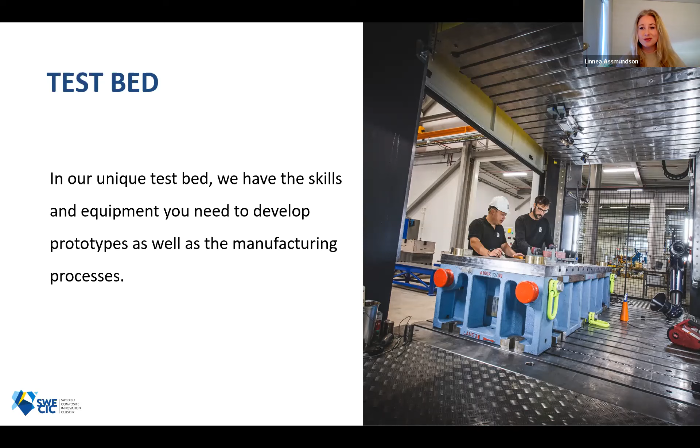So what do we do? We work with development. We help companies speed up their innovations. We have a test bed that is open access to you, and if you have an idea that you want to develop or want to try out something, don't hesitate to contact us. We can guide you all the way.

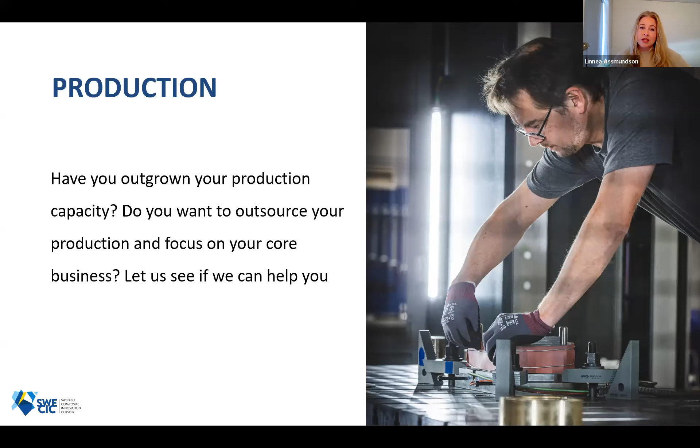And we can also help you with the production. We have knowledge within most of the different types of production methods that are normally used. If you want to contact us, these are our contact details.

Anders, that's your cue. You are responsible for that conference, aren't you? Oh, at least one of the sessions. Okay, great, Linnea, thank you.

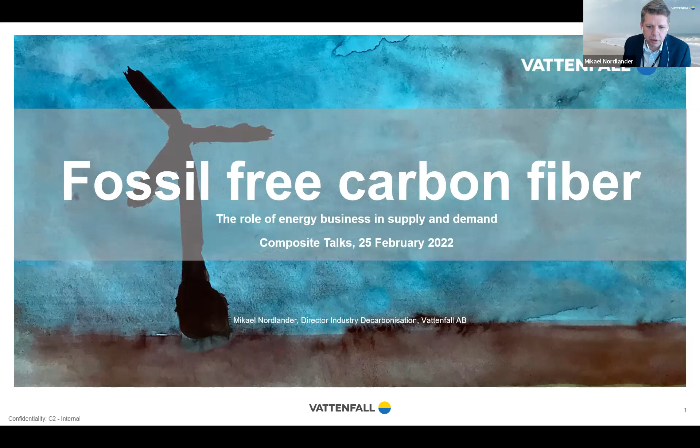I will try to dwell into these two perspectives, and in particular what it means for composites, and most notably carbon fiber, which has been a specific interest of ours.

I won't bore you too much with what Vattenfall is. I'd recommend going to our homepage, but condensed to its essence, what we're doing is trying to achieve fossil-free living within one generation, because we believe that being sustainable is a prerequisite for still being in business one generation from now.

That basically runs through everything we do right now, and I'll go through why and how that happens. First, why we as a power company see that we can play a role far beyond our own operations, how we team up with industries to get rid of emissions beyond what we do ourselves in the power sector. A bit on why we started this in Sweden, and the dual roles I mentioned - as a supplier of fossil-free energy to industry, and as a customer of what comes out of the industry and those value chains. Finally, a few words on why we believe this will mean a sound business long term.

So if we start briefly with why electrification - well, this is truly a depressing picture, I realize, but the fact is that still today about 80% of all energy consumed globally is fossil fuels. And although renewables are steeply on the increase, we have lots to do when it comes to replacing fossil fuels.

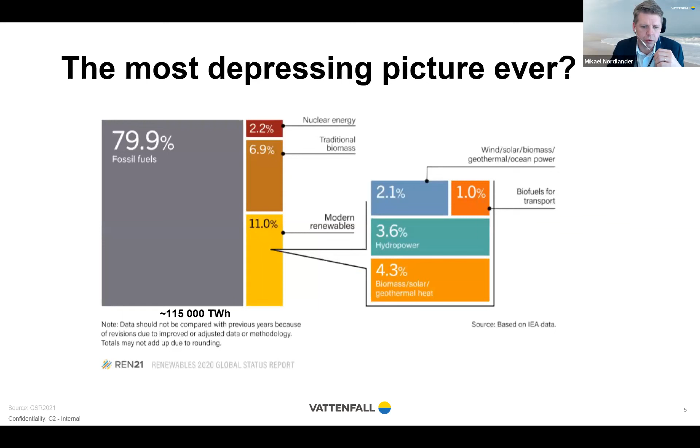In several sectors we know how to do that, but I'll focus on the ones where it's a bit harder - the ones typically labeled the hard-to-abate sectors.

If we envision ourselves mid-century and look at how we can possibly get rid of fossil fuel use - if we need to replace that energy in all its applications, be it heating, power generation, transport, or industry - we believe the most promising solution is to do it with fossil-free and renewable power.

Wind and solar have shown tremendous cost decreases in the recent decade, and they're also pretty quick to scale up, so we can really reap the benefits of manufacturing economics when expanding that. This is basically our best shot, but it will be quite dramatic if we are to replace those vast amounts of fossil fuels - some estimates suggest up to 5 times more power production than we have today.

The lower end of that scale depends on how successful we are in becoming a more circular economy. So there's really no contradiction between the circular economy, energy efficiency, and shifting to fossil-free and renewable electricity. We need to do both - the more successful we are in efficiency and circularity, the less primary power is needed. Now, square electricity doesn't fit into round applications everywhere.

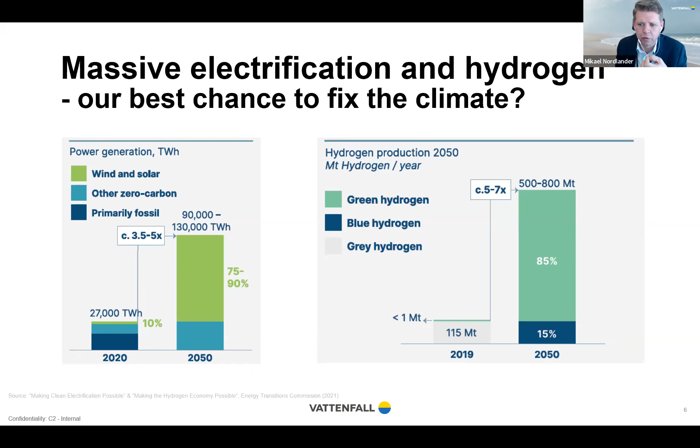So an important part of this electrification, we believe, will happen as electricity is converted to hydrogen. Hydrogen can then play a role in replacing fossil fuels in primarily lots of various processes in the industry.

Going into what we're doing in industrial partnerships, the heavy industrial processes we're focusing on are primarily the ones producing basic materials. Steel, cement, and plastics are responsible for not 20% of emissions in industry, but 20% of global emissions. In Sweden that's no exception - about one third of CO2 emissions comes from industry, and 85% of that is in steel, cement, and petrochemicals. So if we target these, we have a big part of the solution.

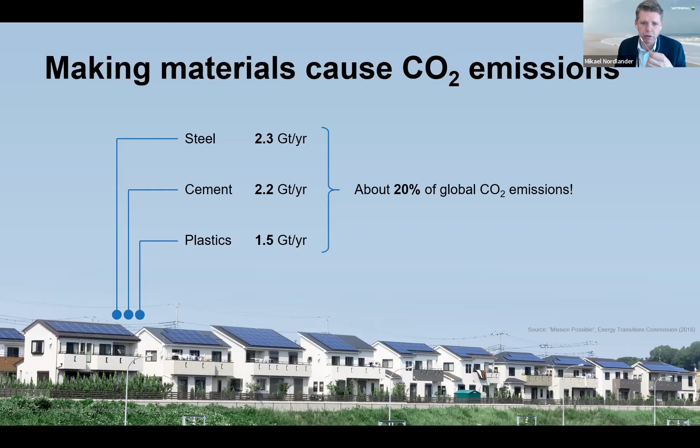Fossil-free electricity could be applicable in some ways, but we distinguish where we can use it directly - for example for heating and motion - versus where we first need to convert it to hydrogen, which we typically label indirect electrification.

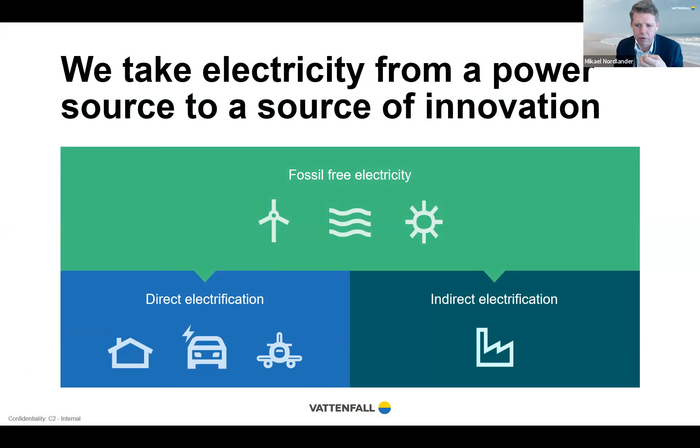The most visible project we have in this type of cooperation with industry so far is known from northern Sweden.

It's a HYBRIT cooperation where we are working together with LKAB and SSAB with the purpose of converting the value chain for making steel and totally removing the use of coal in that. And we're quite well on the way here. We have actually already produced the first tons in our test plant.

So Sweden is quite in a unique position of having lots of access to clean and affordable electricity. And that's why we see the development starting here, because forming these new value chains, if you have a power dependency of power, at least that part is becoming less risky.

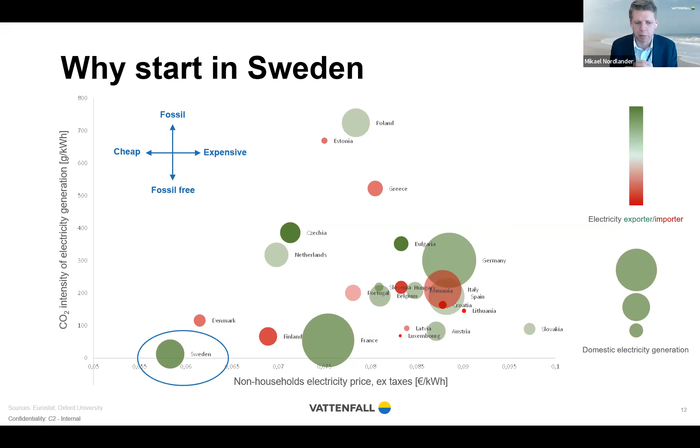Apart from this situation, we also see in the upcoming years that, not least because of the wind power, we will have a further increase in the electricity supply, primarily in northern Sweden. And that is mostly due to that we have now learned to build wind power primarily so cheap that it doesn't need subsidies anymore. So this is happening by itself.

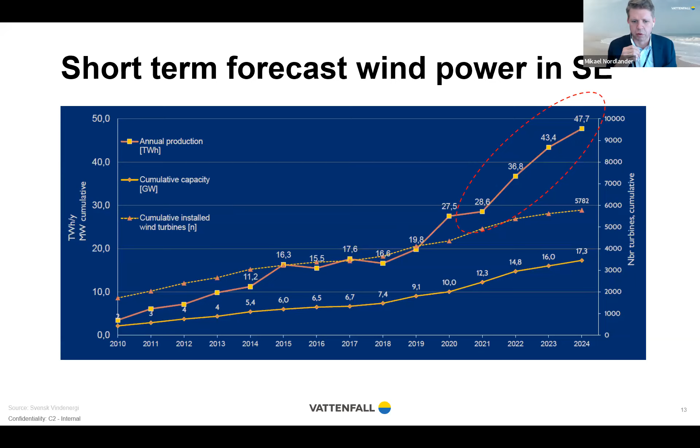But of course, when you see this virtuous circle of industries now asking for more fossil-free electricity, this growth is even stronger. So I've already touched about it in our role as a supplier, but what does this mean then specifically for the composite and carbon fiber industry?

Well, if you look at how it's typically done today, you crack naphtha into the basic olefins, and this is where the major part of the emissions along the value chain is. And this is where we believe that we can take a stab on how to fundamentally change things.

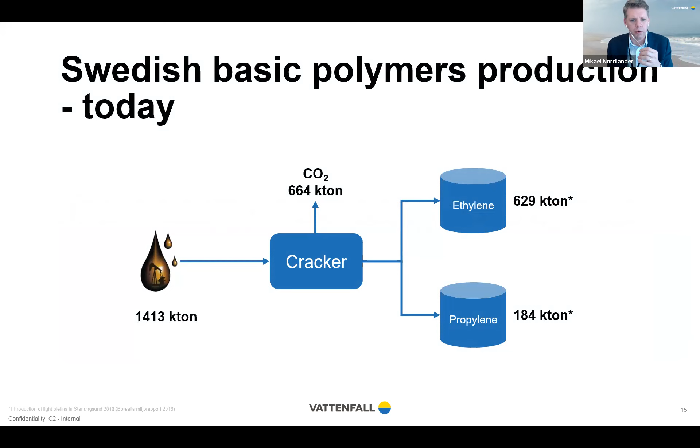What we're suggesting that you could do is that you can start with a carbon source that is biogenic CO2. We have 35 million tons coming out of pulp mills and biomass CHPs primarily in Sweden today. And combining that carbon dioxide, which you can see as a depleted carbon source, with an energy-rich hydrogen coming from electricity, you can then form various basic hydrocarbons, which you can then process into olefins such as ethylene and propylene.

And this is just an example of how to do this, technology that is today known, for example by forming methanol and then processing it further through a methanol-to-olefins process.

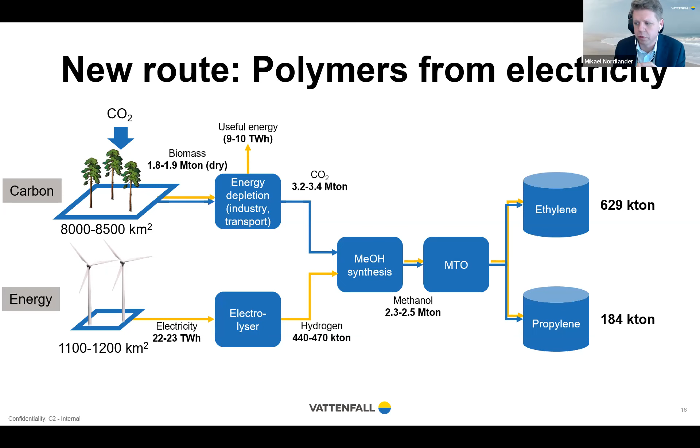And if you look at that full value chain, if you manage to do this and you handle this first part of the chain, well, you can follow here what happens. Once you get to propylene, you can then basically have a plug and play process to what already exists today, further into acrylonitrile, AN fiber, then PAN fiber, and then finally carbon fiber in the end to its applications. This way you would never mess with the qualities of the carbon fiber because you're using the same kind of base chemical as you do today.

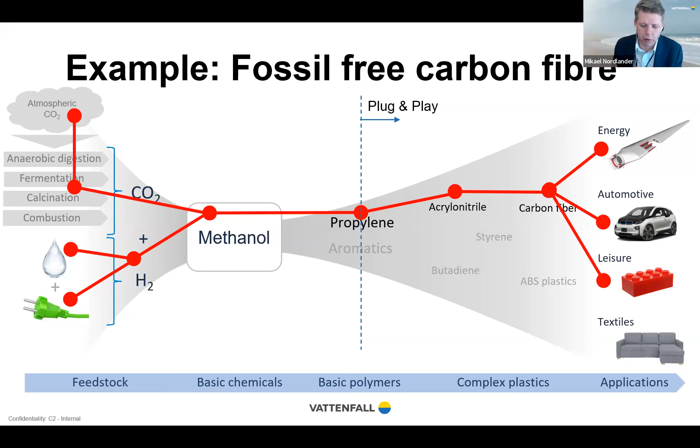And also, if you're doing this at large scale, the area requirement is hopefully quite minor. Turning around then, if this carbon fiber is embedded in blades and built into wind power plants, this comes back to us in the other end as a customer.

And if you look at the carbon footprint today of wind power, which is somewhere around maybe 7 grams of CO2 per produced kilowatt hour, since the fuel is free, it basically boils down to the embedded emissions from the materials and the manufacturing process. And the major part there is steel and cement.

As you saw from the Hybrit slide, we are already on to producing steel without footprint. Cement, in case you have that kind of foundations, we're also looking into, and with the refinery processes and what's happening on the west coast of Sweden now, also HVO as a replacement for diesel is on its way.

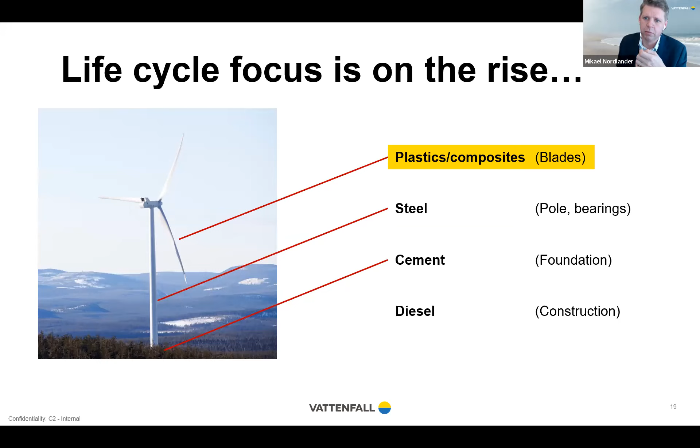And then what is left is basically the carbon footprint of the blades. So the more we're successful with the other basic materials, the more the attention will come to plastics and composites.

If we look at the investment plan that Vattenfall has over the upcoming years, I don't have the latest figure, but it's pretty similar in the same direction. A majority of our growth capex is going into wind power.

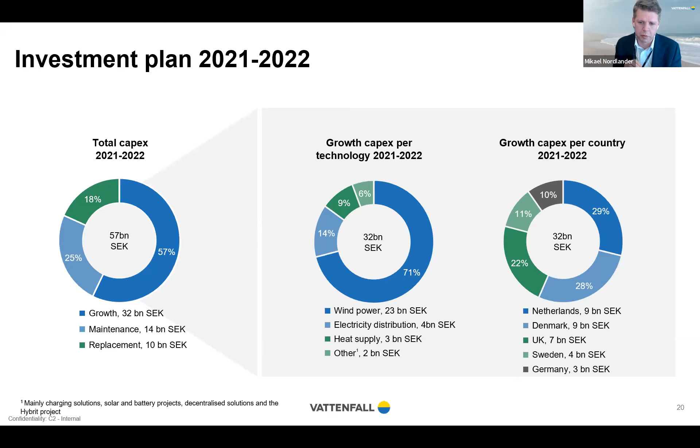As you see, there's 71%, or 23 billion SEK, over the two-year period of 21 to 22. So we're at a pace of about 1 billion euro per year investment. These things matter, and we've had third-party review of our goals at Vattenfall to be in line with the Paris Agreement, and we're also now starting to put requirements on our suppliers to reduce their footprint.

We want to cut the scope 3 emissions of Vattenfall in half by around 2030. Finally, a few words on why we think this is a sound business case. It all boils down basically to the value chain logic here.

If we look at the crude materials we're producing, you could envision that a cost increase in those would basically kill the business case. But if you take one example, steel has a market price that's about half the price of potatoes. So it's a really cheap material, and adding maybe 20% to the cost, which was an initial estimate for Hybrit, would add about 100 euros per ton of steel. Now, if you turn a ton of steel into a car, and that 100-something euros ends up on top of the price tag of the car, that becomes really marginal at the product level.

I'd argue the same logic applies to fossil-free materials going into wind turbines. In the end, the turbine is of course somewhat more expensive, but if you look at the levelized cost of electricity, the effect is actually quite marginal. It's also becoming a selling point to be the ones with the prime carbon footprint behavior, so to say.

We also see that customers are starting to value this. So even if regulatory systems are too slow, there's pressure on the customer side, which we've seen and experienced, not least from the Hybrit project, where we already have customers lining up to buy fossil-free steel, despite it being somewhat more expensive than conventional steel.

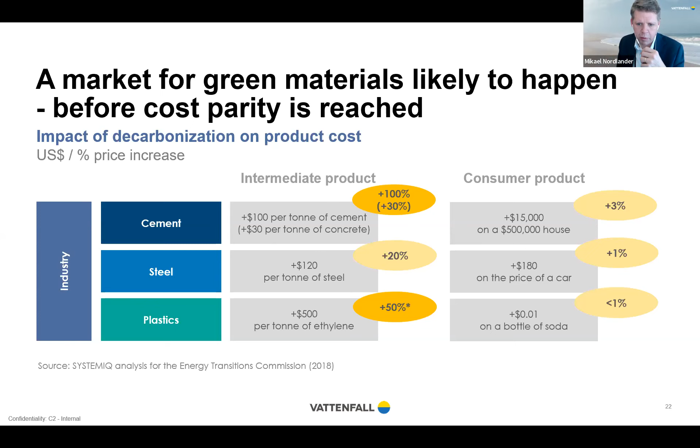And I'm happy to take any questions now, Anders, if you were thinking about that, or we save it for the panel discussion. I don't know how you want to do it.

Okay, thank you, Mikael. Linnea, I don't know if we've received any questions, but otherwise, regarding the low cost energy we have in Sweden, do you see a trend of bringing companies back to Sweden? Because looking at the energy mix in, for example, China, where a lot of composite production is today, it's really detrimental from a life cycle analysis point of view.

Do you see a trend in companies being more interested in bringing production back to Sweden? Yes, definitely. We've seen this trend for a couple of years now, especially to northern Sweden. The Hybrit project is just one example. There's a similar greenfield project for steel in Boden, H2 Green Steel. We've seen Northvolt set up a battery factory in Skellefteå. There's also been an international fertilizer company testing the grounds in Luleå for an ammonia plant.

So all these really energy-intensive industries are looking at Sweden right now. So Norrbotten is the place to be. I wonder, we've all read in the news that there's going to be tremendous development in Norrbotten, and challenges for everything from schools to hospitals to everything basically.

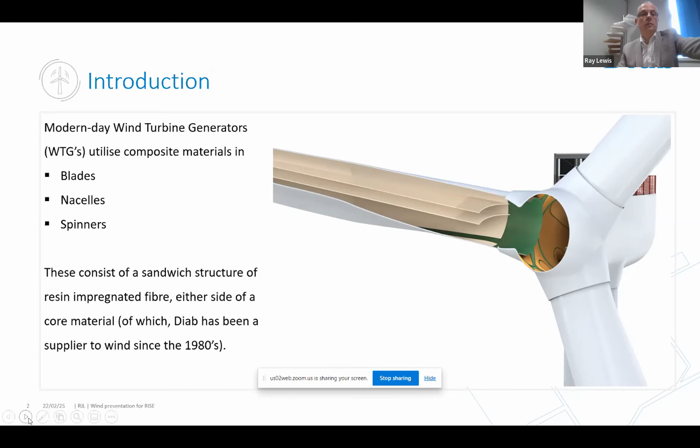Traditionally, Diab was one of the original PVC manufacturers in the world, which came as a result of the industrial area around the Second World War. The company has grown from there. PVC got used in marine applications, we got a lot of knowledge, and then it was transferred basically to wind when that market came on.

So if we look at the nacelle and spinner market as a very quick overview, most of these structures are effectively non-structural. If you go back a few years, a lot of them were metallic, and they progressively got replaced, either with single skin composites or sandwich composites, where core got introduced. They've mainly been non-structural, although some designs have actually become structural, so they've called for different materials.

If you look at the materials used there, typically they've been relatively low density materials, 45 kilos per cubic meter PVC, and then 60 kilo on the structural designs.

We've all gone through various evolutions over the years, and cost became a really high focus when the market grew several years ago. Polyurethane became quite an attractive material because of its low cost base, and again relatively low because of the non-structural requirements.

Then in more recent times, as a result of cost changing, PU wasn't as competitive. PET came in as a really sustainable material, which I'll talk about more on the following slides, and that has become a little bit of a default material in these applications, typically around 60 to 80 kilo per cubic meter PET. Initially virgin material, and more recently recycled, coming from the likes of post-consumer bottles of PET, etc.

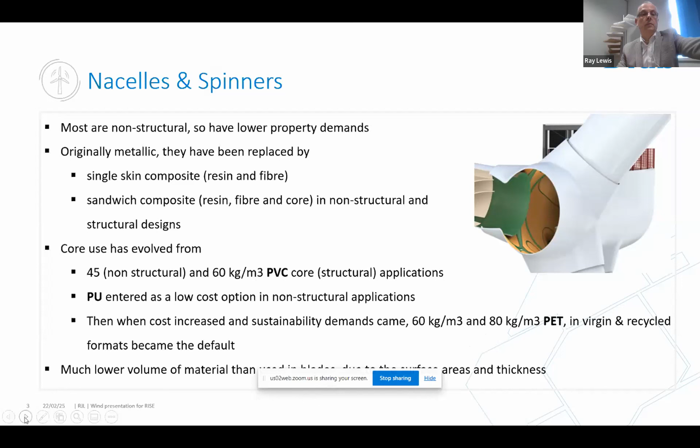So if we drop down to blades, it's obviously a similar situation with resin, the reinforcement, and core. Here I'll just go into the core material in a little bit more detail.

The range here tends to increase, as you can see, from 60 up to 250 kilo density PET, which is being used in very recent times. Those have become, if you like, the default materials. Fundamentally that sandwich structure has remained the same in these horizontal axis wind turbines.

We see changes for the same reasons that Mikael showed in his presentation. Resins have been changing—mainly epoxy, vinyl ester coming in—and now people are looking at what's the next sustainable material. And of course there's the movement everyone's familiar with as carbon has got introduced as the blades have got longer. We've seen really the same on core materials, which is what I'll go through in a little bit more detail today.

The process that typically is used today is the infusion process. In the past, people used wet layup, and I think you're all familiar with one not so far away that started using prepreg. It's still used today, but it's infusion that really is used everywhere.

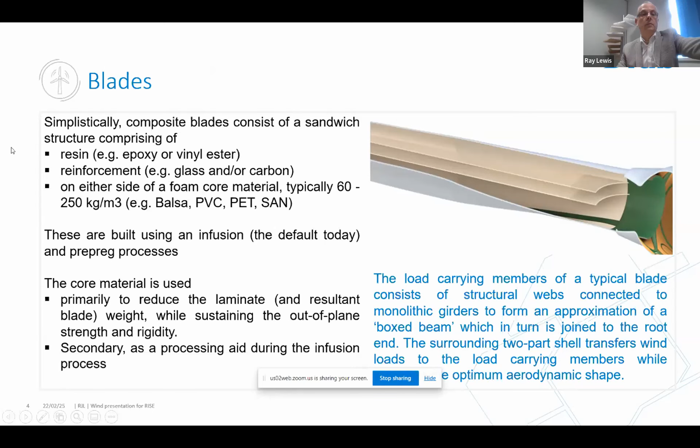Sorry, I've just lost my mouse.

If we look at the various areas in the blade, you can say there's simplistically 3 areas: the webs, and then the shells, and you can break the shells into the root and shoulder area and the shoulder to tip area. In the webs, it was really originally PVC materials, sort of 60 to 80 kilo, and then it's transferred to typically around 100, 115 kilo density PET materials. And of course, these make up the box section of the design.

In the shell, you have the root to shoulder area, which is really the thickest section area of the blade, and there's a lot of forces that come into being here. Balsa has been a default for many people because of its high compression modulus properties. PVC was really quite expensive, so to use anything comparable would be such a significant cost, although some people did use that. You could engineer out that disadvantage, and some suppliers did.

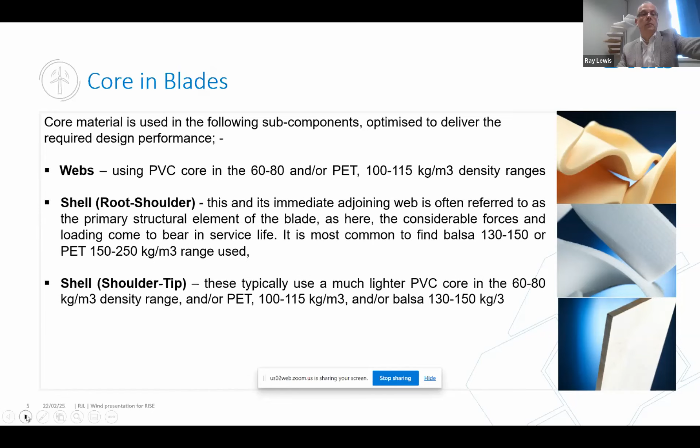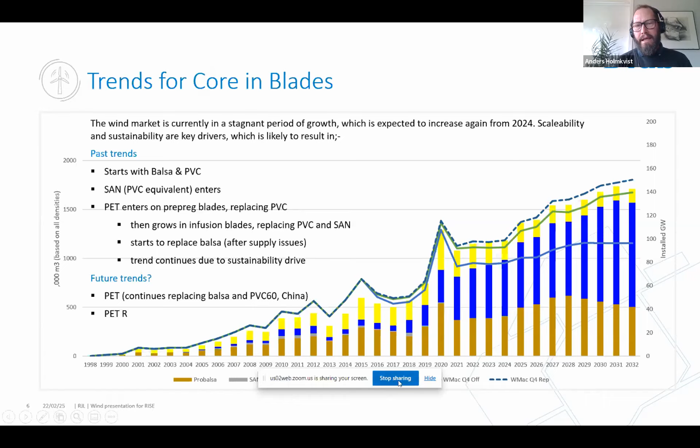But let's move over to Greger Nilsson, who is the founder and owner of Blade Solutions. And this is extra nice, as you're also one of the companies within SWE-CIC. So it's especially honorable to invite you to speak. And you will be talking a bit about your company and repair of blades.

Thank you for the introduction, Anders. From a green point of view, our part is expanding the life of the blade. And our area of knowledge is repair of the carbon heat mats and also doing cold climate repairs. I'll start with the carbon heat mats.

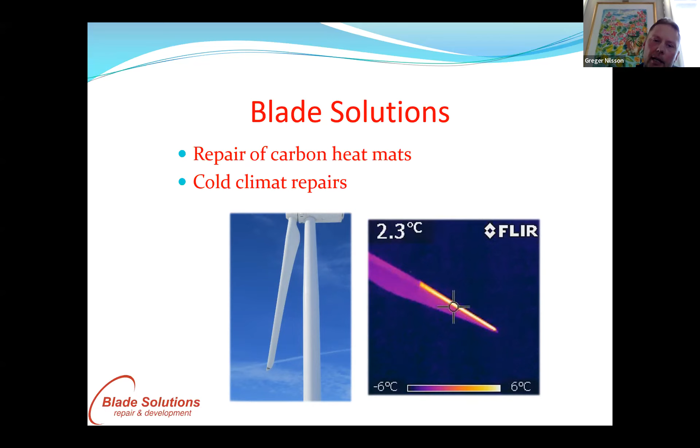In the northern part of Scandinavia, you need some kind of heat in the blade to produce power in winter. And one way is to have a carbon mat on the leading edge. And if you look with an infrared camera, you can see you have a hotter area here. And that's to melt away the ice. And why it's good to melt the ice:

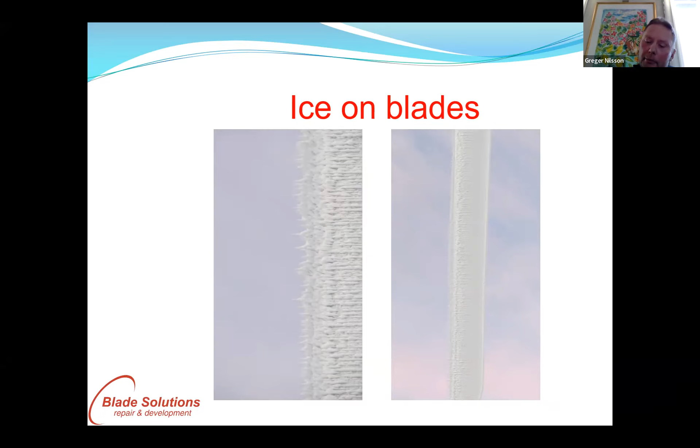This is a typical blade without some kind of heat. And you can see this turbine will not produce any power. So you have to wait until the temperature goes down or goes up, or you lose a lot of production anyway. But the heat system always needs some service. And one thing that is, I will not say common, but if there are a lot of turbines, there will be some problem, and you can have some impact on the blade.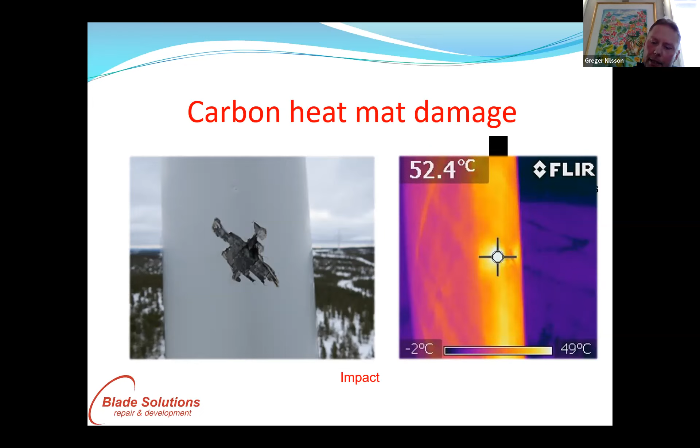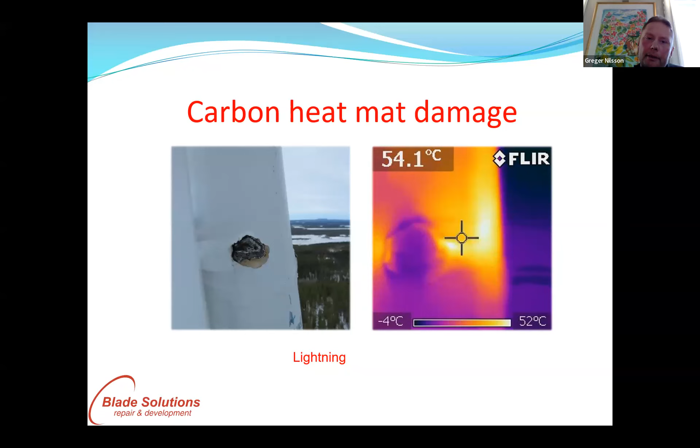And another thing that is quite common is you have a lightning strike that hits the heat mat instead of the lightning system, and then you also have a damage on the carbon mat, and so you have a hot spot around the damage, and you have to do some repairs for this. But the tricky part is to find the damage.

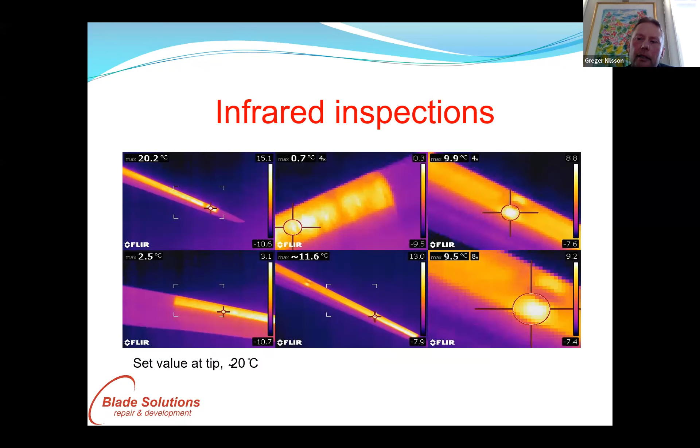That's why we use a long range infrared camera, so we can stand on the ground and scan the blade. A typical inspection takes half an hour, and what we look for is some variation in the temperature of the surface. And if we find some variation, we'll go up and look at the blade directly. This is a lot of repairs we have done over the years, but a carbon heat repair is very time consuming. So it's good if you can find the damage soon, before the damage gets too large.

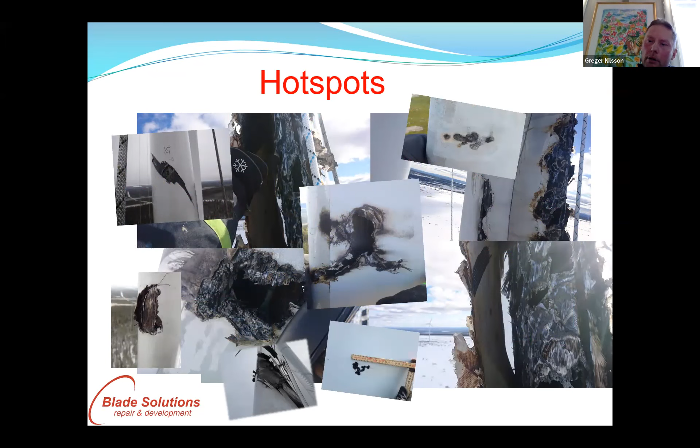And to develop repair methods, we do a lot of specimens in our laboratory where we create damage. Every damage is not the same. So on a regular basis, we train how to repair a specific damage before we do it up tower.

I will go back. And we have also developed two patents in this area.

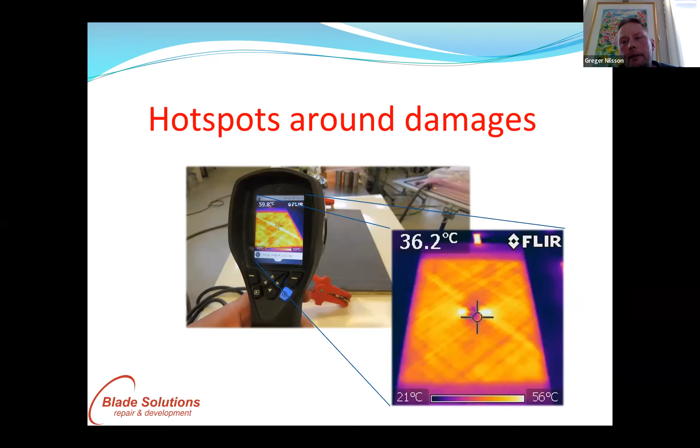The other part we work a lot with is doing cold climate repairs. Why do we want to repair in cold climate? If you find damage in winter, maybe you have to shut down the turbine. If you have a structural damage, you may have to shut it down for half a year and lose half a year of production waiting for a summer repair. If it's minus 20 degrees outside and you have minus 20 degrees on the surface, at the interface between the laminate and the repair, it's impossible to do the repair.

If you do it anyway, you have to put some heat in it. Normally you put heat from the outside, but that means you have a variation of heat through the repair part. So if you're doing a vacuum infusion for a structural repair, you'll have different viscosity depending on the temperature in that specific part of the repair.

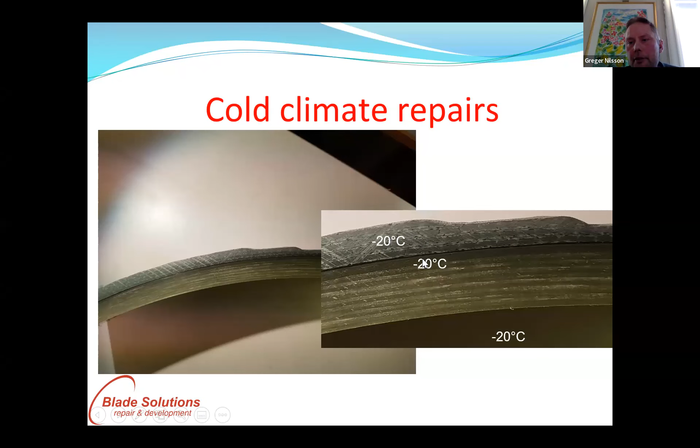That's why we put a typical blade heat system in the repair part. We have the laminate here where there's some damage, and then we put repair material on top, with a carbon layer in between in direct contact with the interface between the repair patch and the laminate. Then we put the vacuum bag on it, connect it to power, and control the exact temperature in the repair.

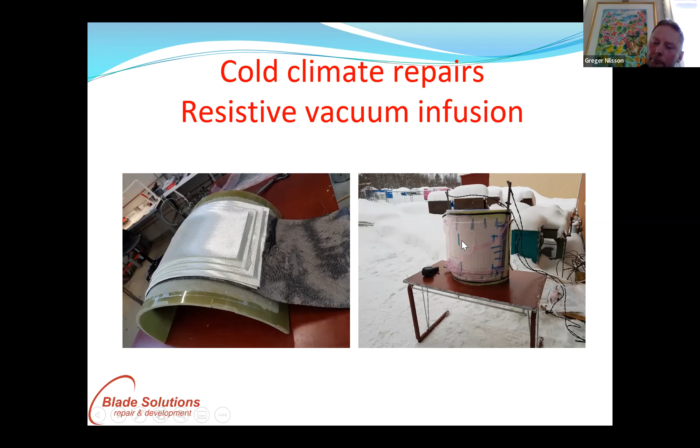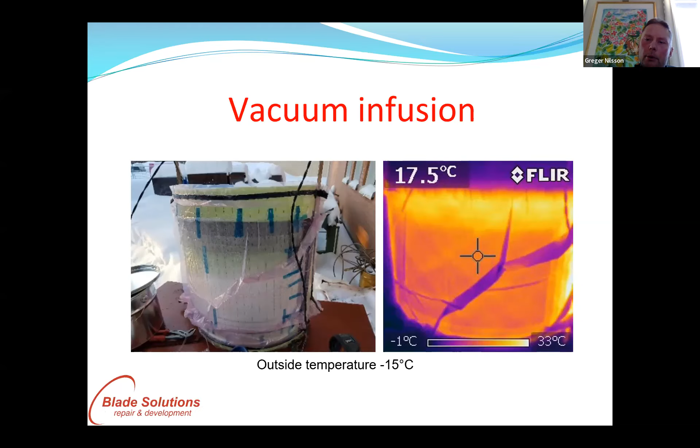So during the infusion, even though we had minus 15 degrees outside, we just put the power we wanted, so we had something like 20 degrees during infusion. We want the same climate as in the blade factory, and in this case we have it. Inside here we have blade factory conditions, so we can make repairs as good as in a laboratory, even doing it up the tower at minus 15 degrees.

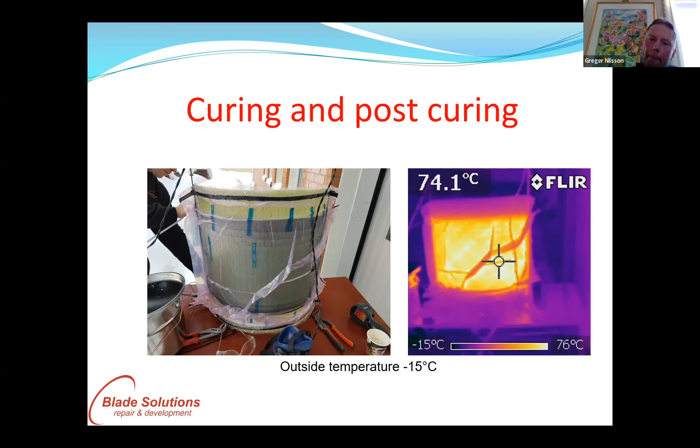After the vacuum infusion, we have a curing and post-curing process. This is a thermal picture from the post-curing where we have something like 70 degrees. This is our resistive vacuum infusion. If we have minus 20 degrees outside, we have exactly the temperature we want at the interface, depending on whether we're doing infusion, curing, or post-curing. We just set the desired power to get the right temperature.

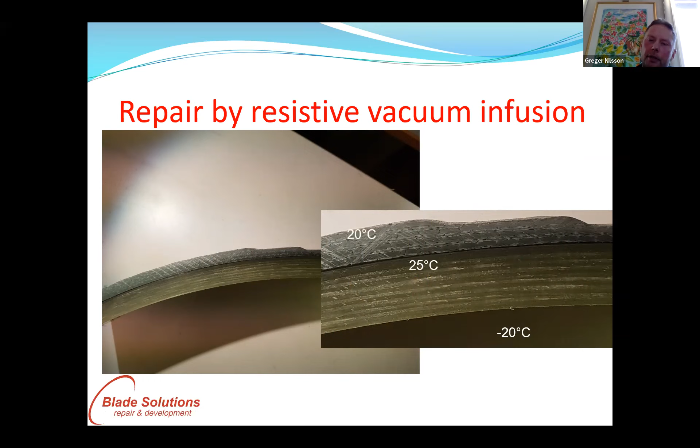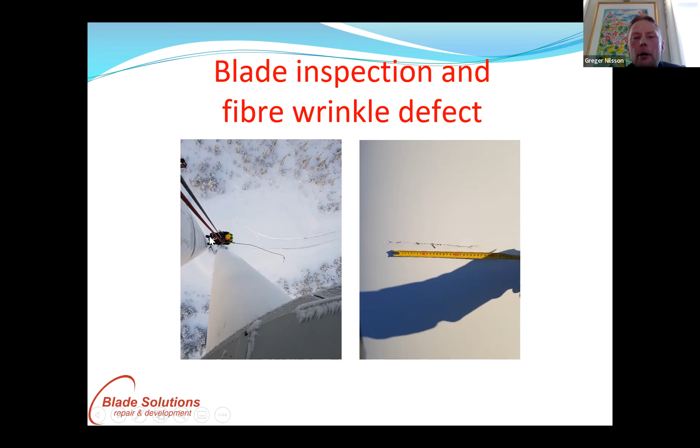This technique is developed for repairing fiber wrinkle defects. It's a quite common defect when making a blade that you get some fiber wrinkles, and you don't find it in the factory. After some years, you'll find a crack. In this case, we go down and find this crack. If we remove the gel coat, we can see the crack and some delaminations. It's quite important to repair this as soon as possible before the crack grows.

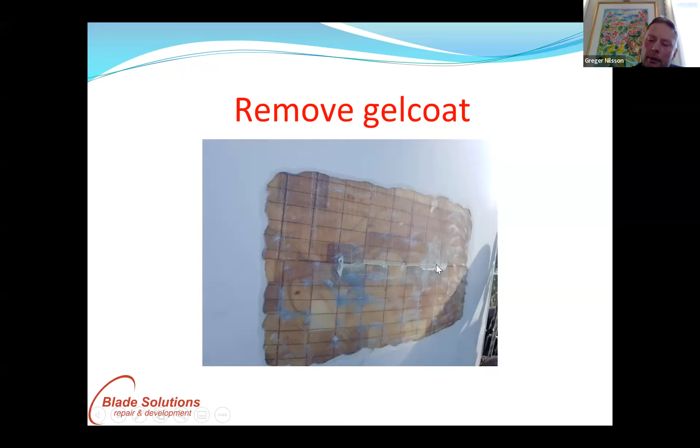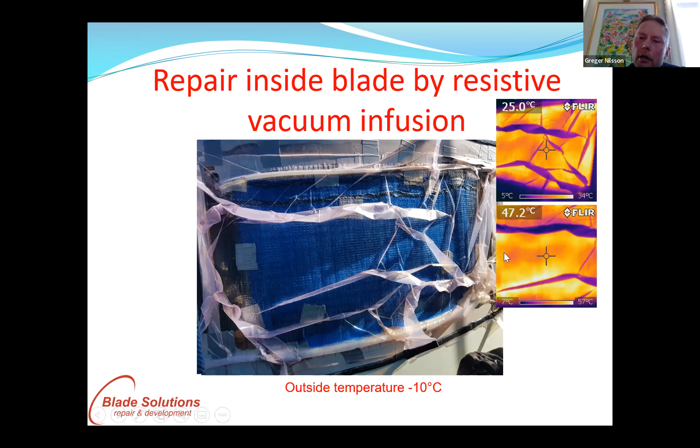This is where we do the vacuum infusion, and here to the right you see the temperature during infusion, we have 25 degrees. After the infusion, we increase the temperature for the curing, so we have around 50 degrees for curing, and we end up with a post-curing process where we have 70 degrees.

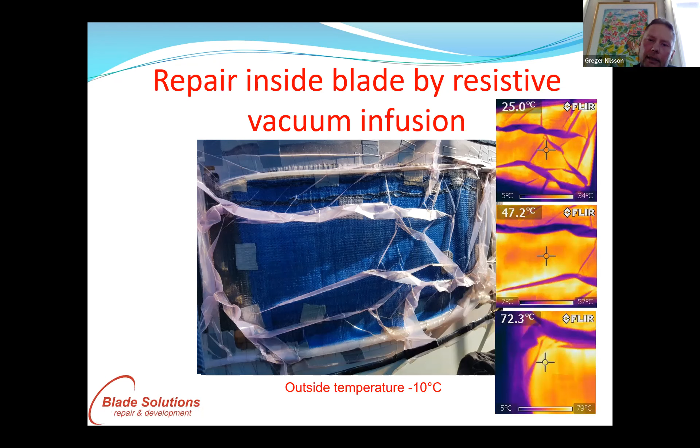Okay, thank you, Greger. I'm curious about your typical work day. It doesn't sound too bad when the weather is good, but I can imagine you have some harsh days at work too. It's not every day like this, I'd say. In some cases we also have a tent around us when we're working, so after some hours you forget where you are, you just focus on your topic.

But from a customer point of view, cost-wise, do you have an assumption about the cost saving? I imagine it's a tremendous cost saving to repair it like this, compared to taking down the blade and repairing it on the ground. Yeah, I think repairing on the ground is too costly, then you remove the blade instead. The crane cost is too high.

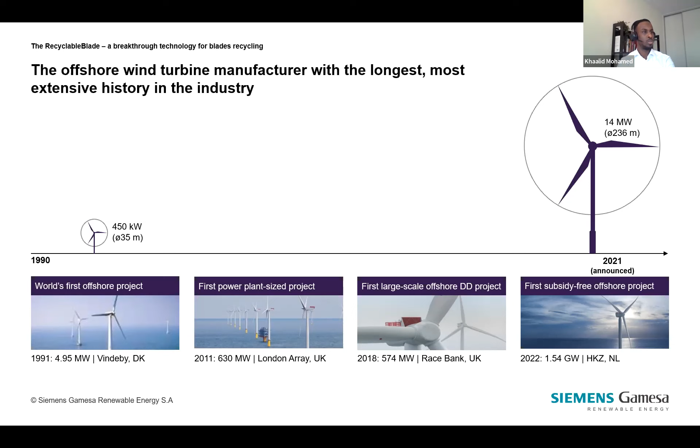So what is the current situation? As presented in the earlier slide, the first offshore wind turbine farm was installed in 1991. It is estimated, at least here in Denmark, that 50% of the existing onshore wind farms in DK alone are more than 15 years old, some of them already approaching end of life and decommissioning time.

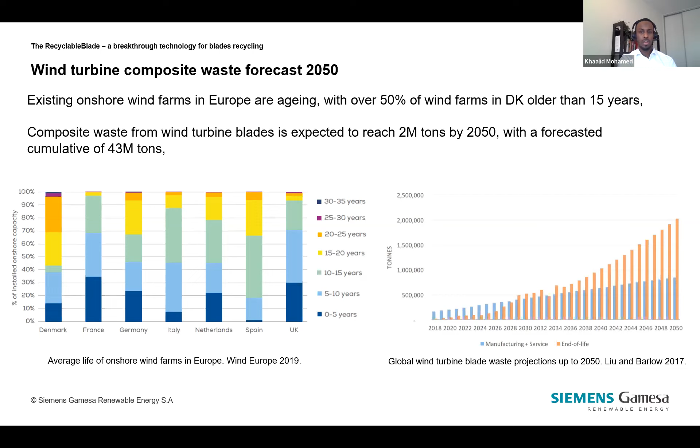This, of course, means that a lot of blades will be produced, also demanding us to think ahead in terms of recyclability of these blades, with estimated values of metric tons that were to be decommissioned by 2050.

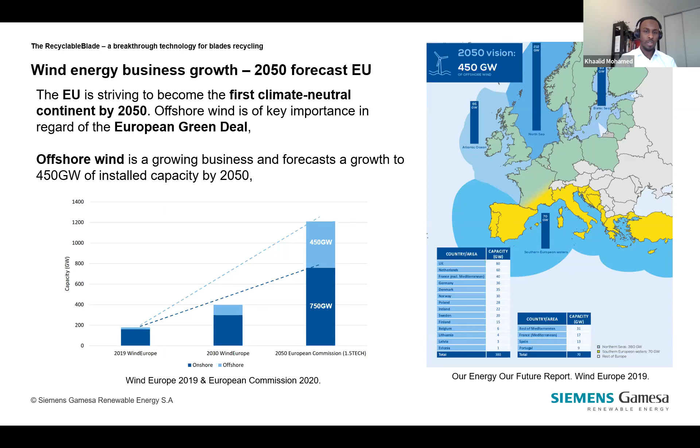An alternative solution is co-processing in cement kilns, where glass fibers can be used to reinforce concrete. And also we have the reuse of components in architecture. But of course, all these solutions are limited and not the exact desired option you would see for a decommissioned blade in terms of recycling.

So the desired option is, of course, recycling. The key will be the removal of the matrix material under mild processing conditions to allow for the recovery of all the constituent materials that go into the composite in a good condition. This allows for all the materials to be reused, perhaps for the same application or other applications, and the value of the materials is kept at a very high level.

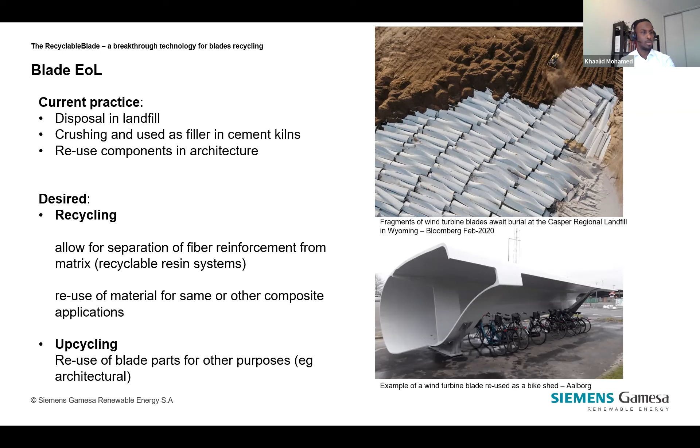Then alternatively, you also have the upcycling option, where you are able to use some parts of the wind turbine blades for other purposes, like we have done here in Aalborg, using that as a bike shed, for instance.

So the recyclable blade, a breakthrough technology, which I truly believe for blades recycling. The recyclable blade is a pioneering solution which enables us to do exactly what the desired outcome in terms of blade end of life would demand, and that is the separation of fibers and matrix to be recycled and reused. The resin itself uses a modified epoxy system, which allows for the recyclability of the thermoset resin by allowing the separation of the composite materials.

This, of course, results in the recovered material retaining a high property level and being usable further for other applications.

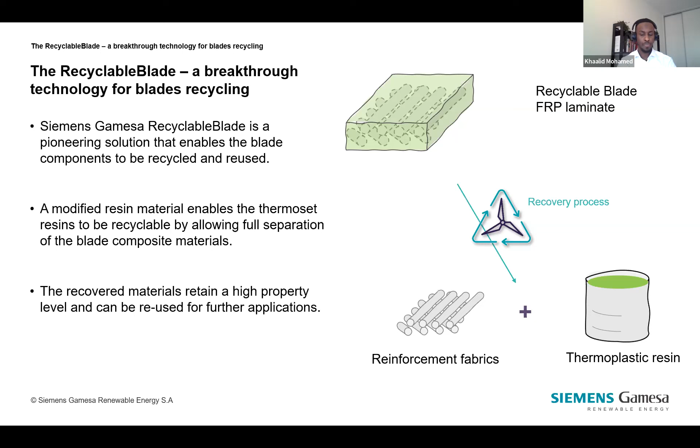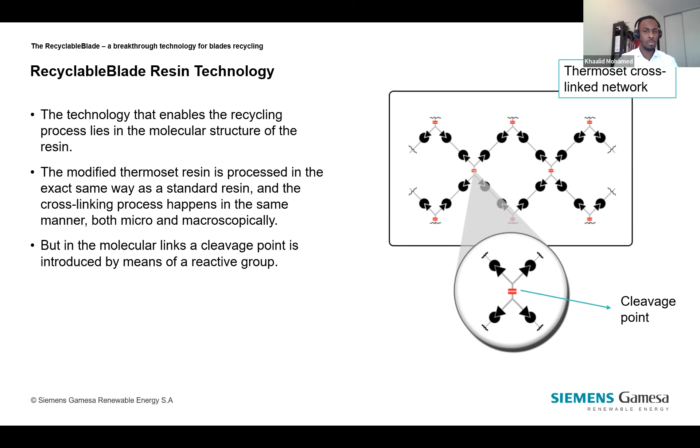Looking briefly at the technology behind the recyclable resin: it is different compared to conventional epoxy resin in the way its molecular structure is composed. Despite being processed the same way as conventional epoxy resin, it is different in that it has a cleavage point introduced by means of a reactive group in the hardener to the resin system. This allows for the decross-linking of the resin system once introduced into mild acidic conditions at an elevated temperature, where the cross-linked networks are broken and the resin is dissolved.

Then the obtained resin can be used as a thermoplastic and reused further for other applications.

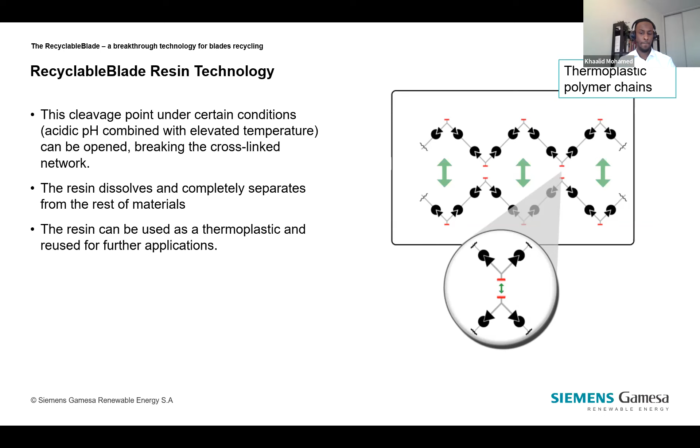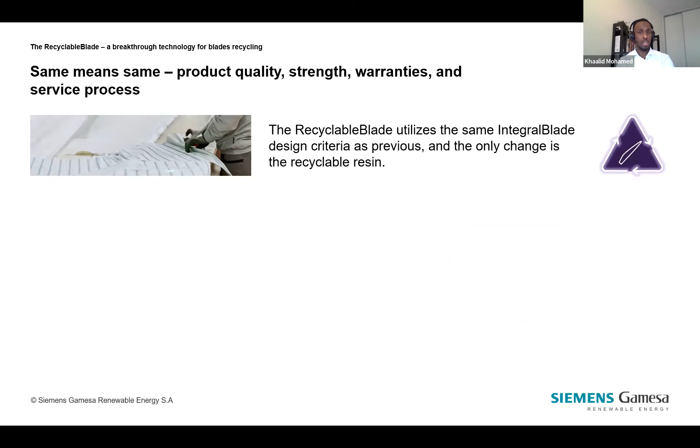It should be emphasized that the resin is in no way different from conventional epoxy resins. We process it in the same way with our integral blade technology and have exactly the same design criteria pertaining to all other epoxy solutions. It's, as mentioned, not structurally different from other current solutions.

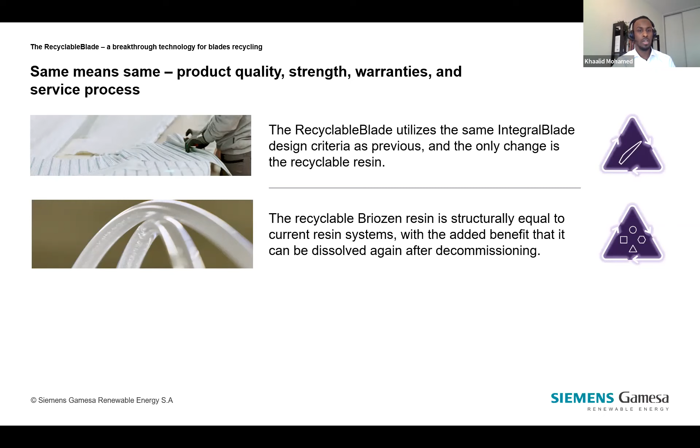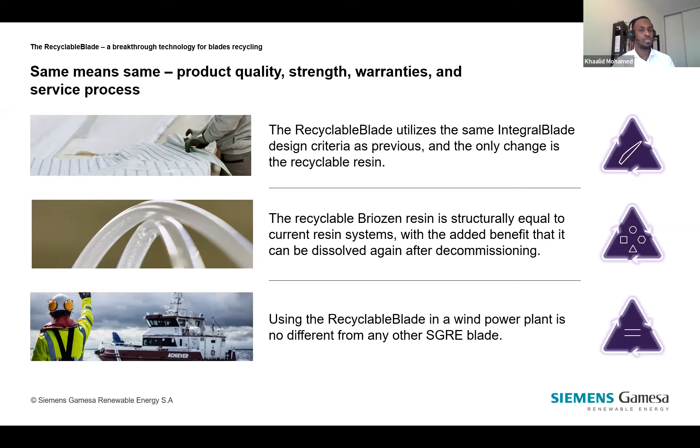It also brings the added benefit of being recyclable, allowing you to dissolve the resin and obtain the individual components of the blade separately. It's used in our wind turbine power plants, and it's no different from any other blades we have previously produced.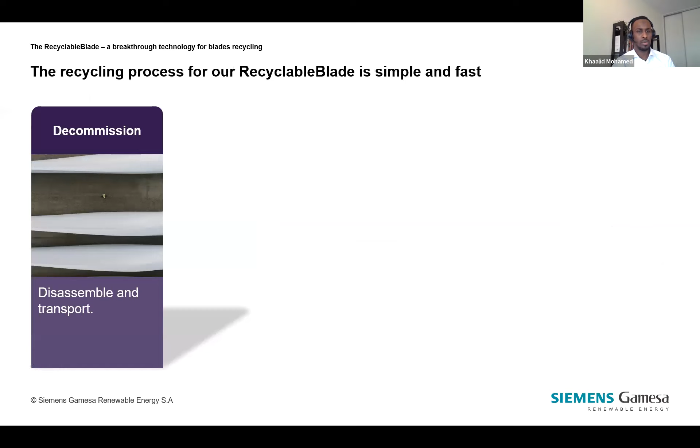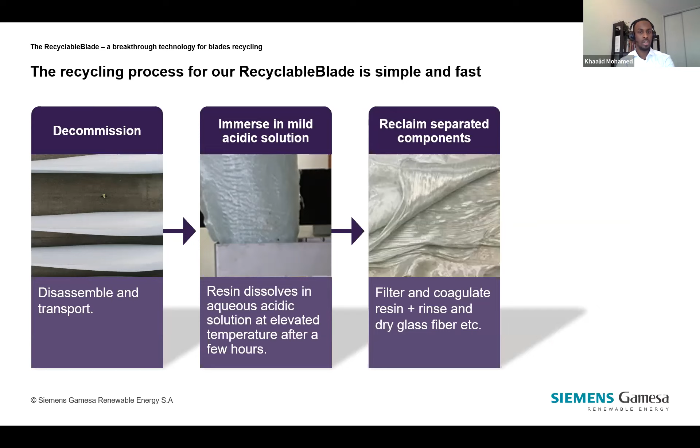Just to give a brief overview of the step-by-step process: once a blade is decommissioned, it's introduced to a recycling phase where you immerse the blade, or cutouts or sections of it—since as discussed, blades are now upwards of 115 meters with no signs of slowing down in size—and dissolve the blade, or the resin, in acidic conditions at elevated temperature for a few hours. That allows you to reclaim the separated components that went into the composite manufacturing, having them as separate layers: glass and core material.

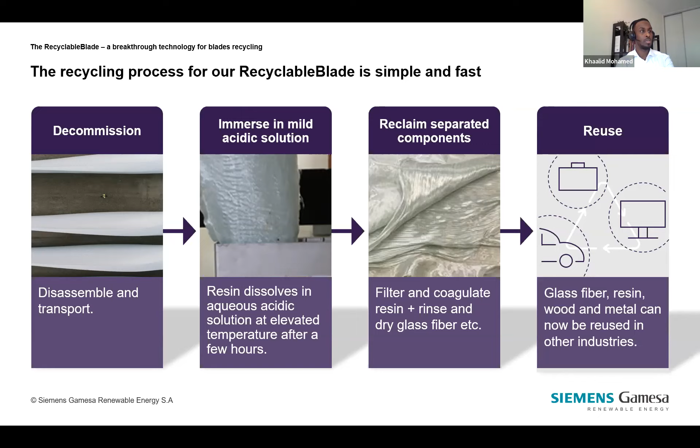And essentially that would also feed into this circularity aspect, giving the chance to use the material for other purposes, or even within the same industry in another turbine.

It's also a paradigm shift of some sort in the manufacturing of wind turbine blades, in the sense that we are actually able to use thermoset resins and also be able to separate them afterwards.

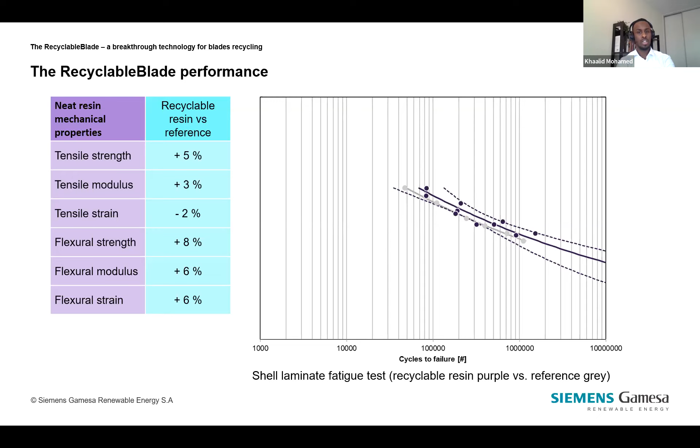As a concluding remark, I had a talk with Anders last week, and he mentioned that the setup we were aiming for in Composite Talks was very much a TED Talk-like setup. And looking back at all the TED Talks I had watched, I was always left with a sense of inspiration, motivation, and direction.

In my attempt to do so, I'd like to present a proverb in my parents' native language, which goes along the lines that a single finger does not wash an entire face. Using that in our industry, we need all interested parties to actually act together to push this agenda of recyclability and circularity within our industry.

That's right from the end consumer sitting in their homes, to suppliers, OEMs, and very much also academia, who has a great stake in this matter pertaining to all of us. And with those words, I'd like to conclude the presentation, and thank you very much for listening in.

Thank you, Khaalid, this is really interesting. We got one question from the chat, which was one I had on my table as well: is this a technology which will be applicable to your competitors or in other composite industries?